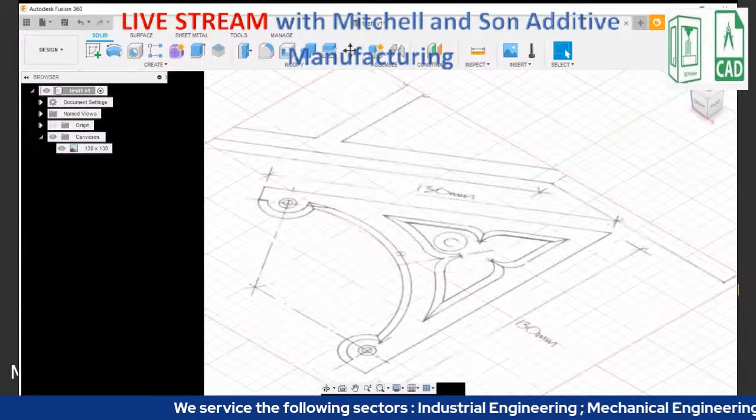So as we go into Fusion here, we get given the drawing, and we can import it into Fusion 360 using this tool - import, gives us the drawing. From that, we can then create a 3D model.

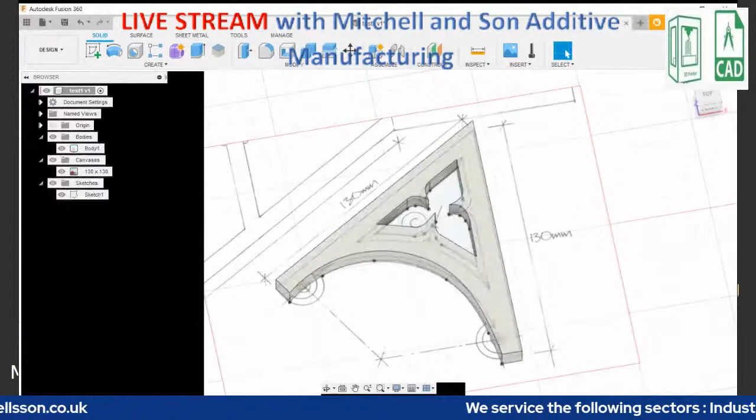How we do that is we use the drawing tool to create that model. So here we have now created a model of the item. I'll just turn that off - here we have the drawing of the outside. As you can see, we've drawn that, taken it and drawn it as it is.

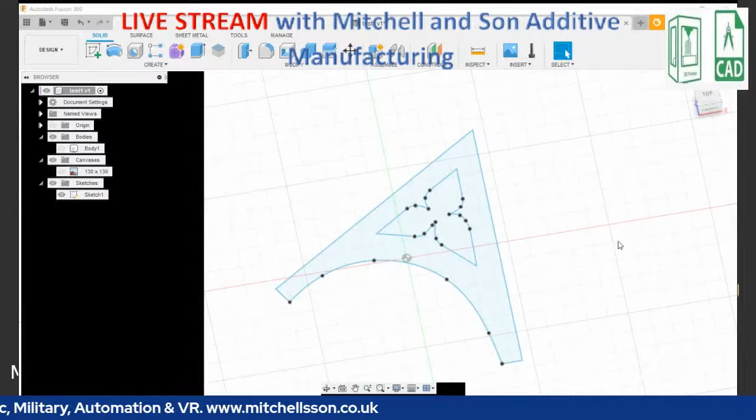We created another drawing using the drawing tools, and then we've extruded it. What extrusion does is take it from a flat object, because that's all we've done - we just recreated a flat object - and then it turns it into 3 dimensions.

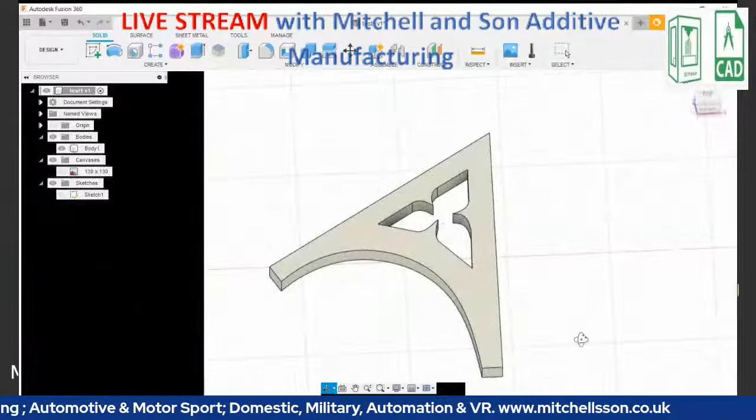So now we have the 3D model in front of us. It's not a complete model, because the holes for the mounting screws need to go in over here, and the chamfers need to go in.

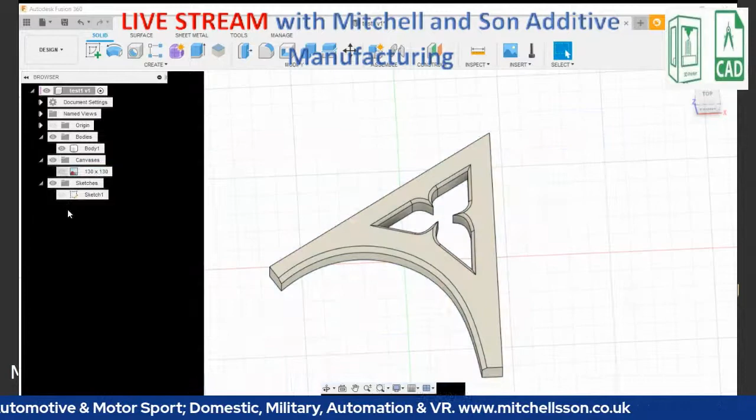So we've added the chamfers - as you can see there, we now have the chamfers in, using the chamfering tool at a 45-degree angle to give that nice rounded edge, as per the drawing, which I've put in there. You can see the chamfered edge in the drawing that we wanted, so we've been able to do that using the chamfering tool.

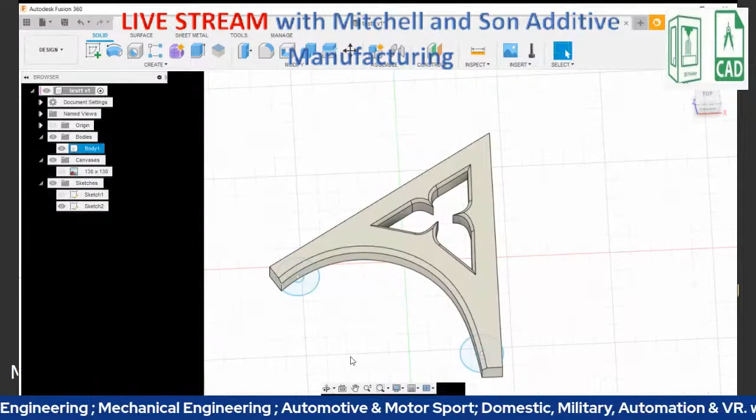Now we need to create the extra bits for the mounting screws, which we've done over there - there's your holes with a hole in, and we extrude those. But now we've got 3 bodies, and we only want to end up with 1 body.

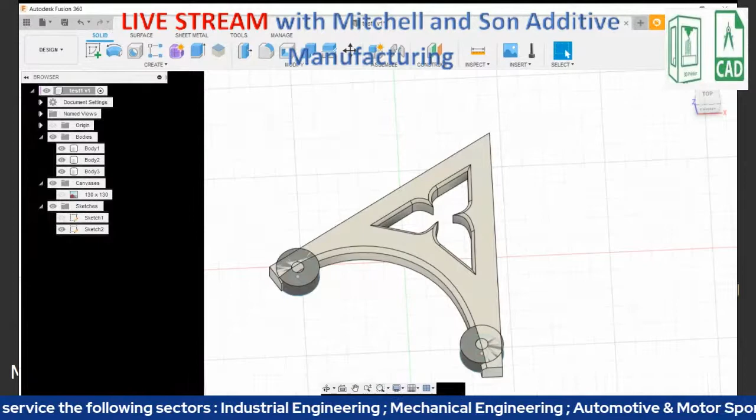Before we combine these bodies and put them in their place, we need to put a little chamfer on them. So on both of those, we've added our chamfer using the chamfer tool. We can hide that drawing now - we don't need it anymore.

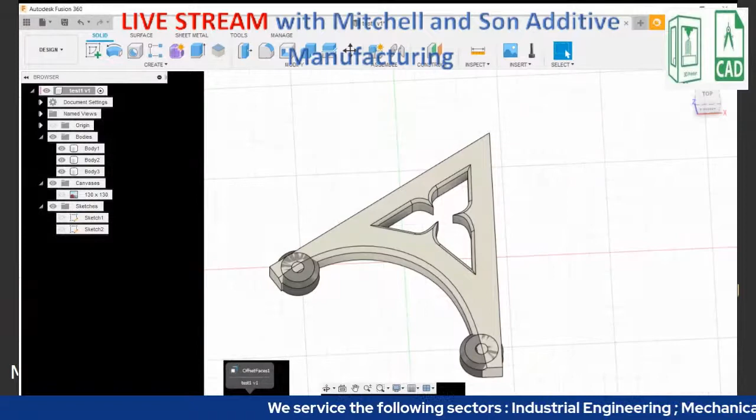Now we want to put them in their right place, but we also want to combine it so it's 1 object, not 3 objects. So that is what we've done now - all those 3 bodies, as you can see, are now just 1 main body. We just need to then make those holes.

See the holes there aren't, they're blocked, so we need to open those up. We again use the same drawing to just extrude those holes through, and then move them as they should be. There we go.

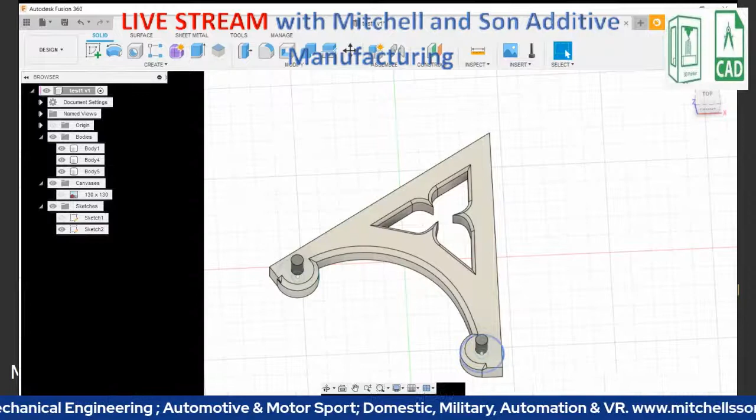Extrude them. Now they've extruded, but now we've got these extra bodies here. Hide the drawing, so we've got these bodies here. We're going to use the cut tool to make those holes, as we see there. And now we've cut them. Now we've got the holes.

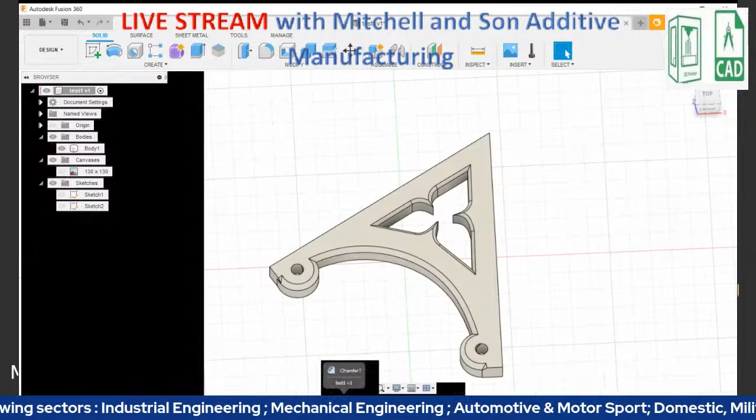But now they need to be chamfered, so that when the screws are on, so we've done that, there we go. And then that's it. So now we stand that up, put that into our real world environment, so that we can send that to the customer and say, have a look at that, are you happy with that? Then you can have a look, and then we have our real world item produced.

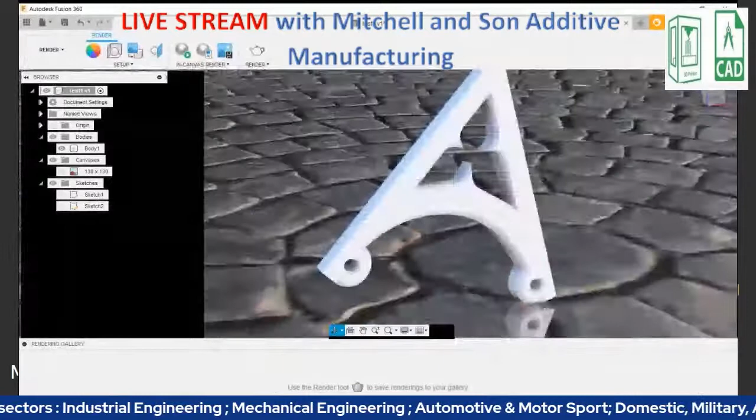The material that is simulated here is ABS plastic. Okay, so that is creating a 3D model.

So what I want to do now is show you, let me just pull up my website, because once you've created the 3D model, which is great, that can be used in a variety of ways, using CNC machining or 3D printing. That's pretty much what CNC machining will use - a CAD model, a 3D CAD model, to create parts even on CNC mills or CNC turning. So any computer numerical control machining will use a 3D model.